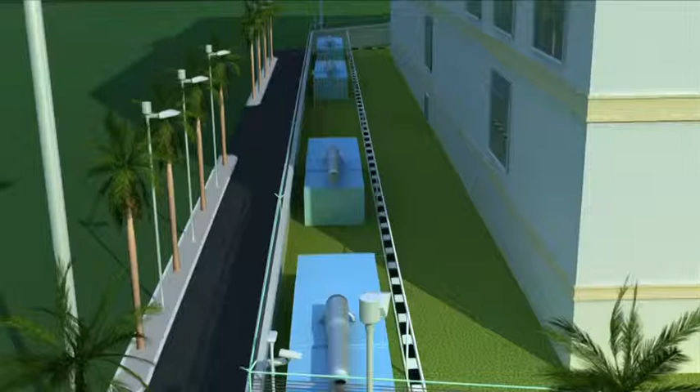With 900,000 square feet of built-up space, adequate space is available all around the building to permit creation of dedicated substations for power, bases for generators, rainwater harvesting, landscapes, diesel tanks and a maze of underground services and cables.

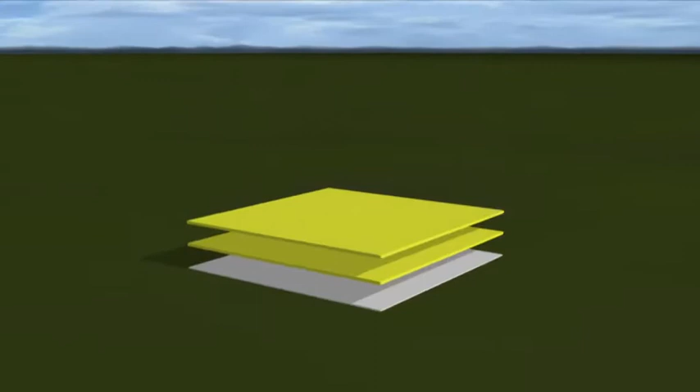The building is a 7-level structure, including 2 base floors that house the utilities and office area. The building's ground and first floor cover the complete area of the building.

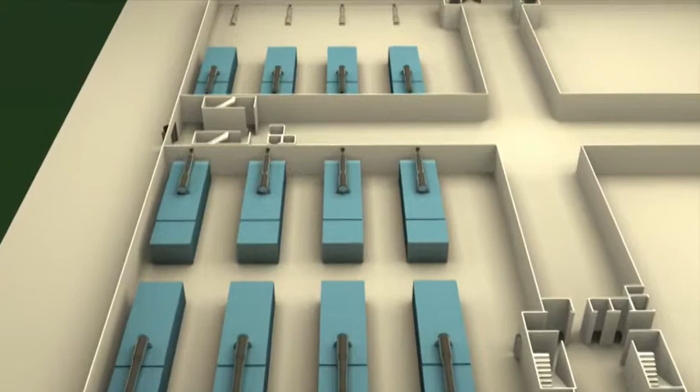The ground floor houses 16 generators of 4 megawatt capacity each. A foolproof dry powder anti-fire system ensures against any possible fire hazard. In addition, 4 generators are placed on the setback.

2 complete floor plates of 25,000 square feet each are set aside as staging areas for equipment for future build of the data center.

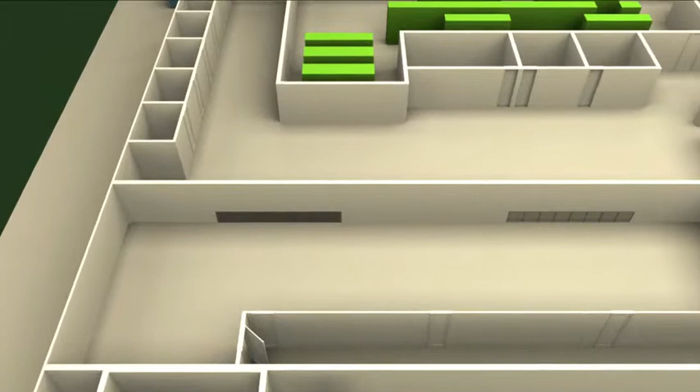A world-class network operations center ensures that the best managed services can be provided to users of the data center for managing their equipment, including servers, routers, firewalls and all equipment.

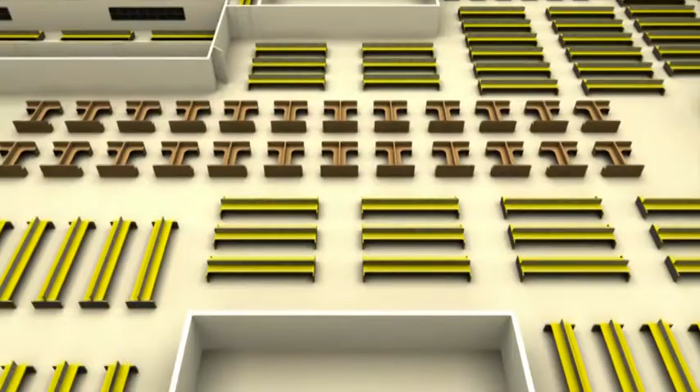An integrated management system ensures that every equipment in the data center is managed effectively and any problem in any equipment is addressed immediately. Up to 1,500 seats for staff of customers ensures that support is available to them as soon as they need it.

The facility has provision for up to 50 meeting rooms. 2 large meet-me rooms give enough space to all domestic and global telecom service providers.

Through this facility, internet service providers, telecom carriers and business customers can access the internet or carrier data services without any restrictions on the bandwidth.

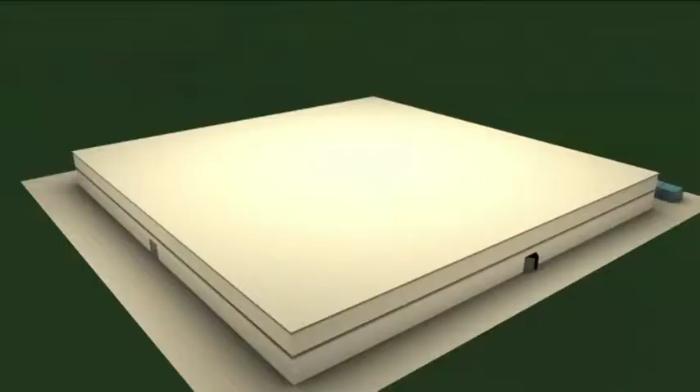With one cross-connect, the Meet Me Room at the Data Center will provide your businesses with access to customers and service providers around the world. 4 towers from the 2nd floor onwards, with 5 floors each, provide 20 separate floor plates of approximately 25,000 square feet to build large data center plates with 2 halls each.

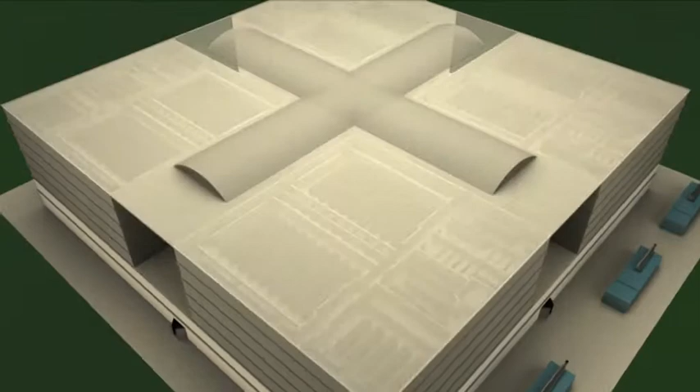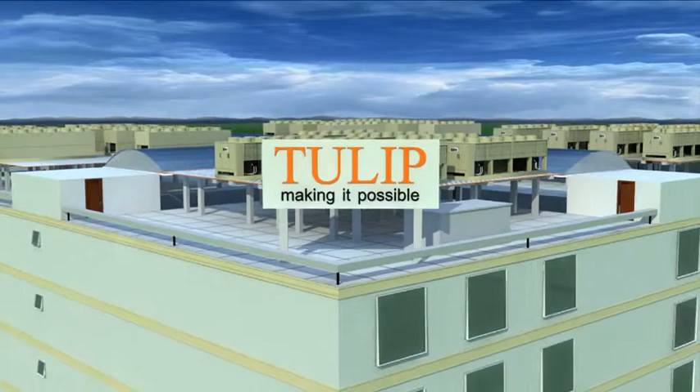Approximately 30 chillers of almost 500-ton capacity provide all the cooling required for equipment consuming up to 100 megawatt of power. The data center is designed to have 66 kV power from 2 separate grids.

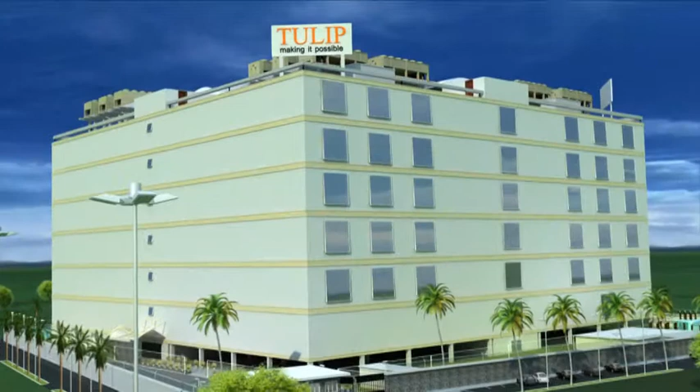The area in front of the building houses a 66 kV substation. 11 kV feeds are used to transmit power to each of the 20 floor plates where they are converted to 415 volts.

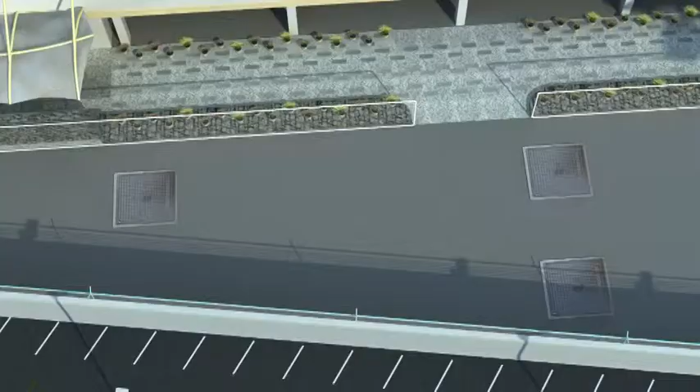There are generators with a capacity of 4 megawatt each to make power available during short and long intervals of power outages. 3 large fuel tanks ensure uninterrupted fuel supply.

The data center is designed for up to 14,000 racks. This could entail a total need of up to 100 megawatt. Each rack is supplied power from 2 different UPS systems to offer source redundancy.

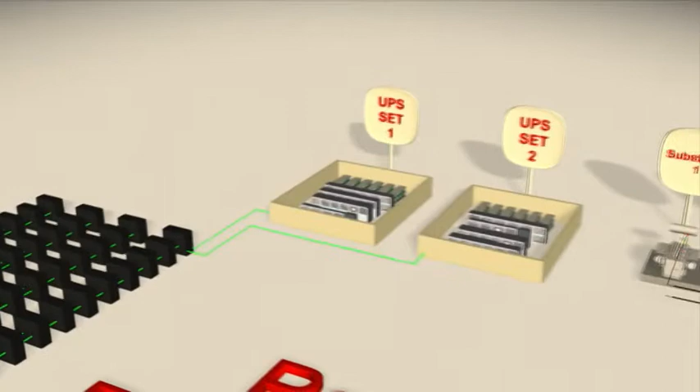Each of the UPS has a 15-minute battery backup in case of power outages. Each set of UPS is supplied power from 2 different dedicated substations. If one substation fails, the other one comes into action automatically.

In addition to this, the facility is backed up by 2 sets of generators. Fiber optic connectivity is delivered to the building by 4 separate underground entrances.

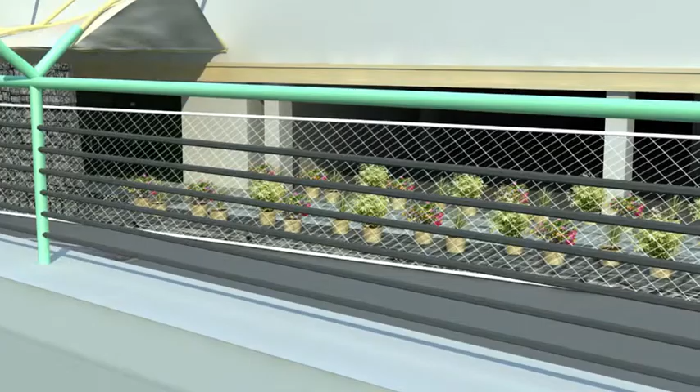The data center offers the highest levels of security supported by the latest technologies. A modern fortress surrounded by a concrete stone compound wall of 10 feet height with a further 4 feet high intelligent fence. Any violation triggers an immediate response.

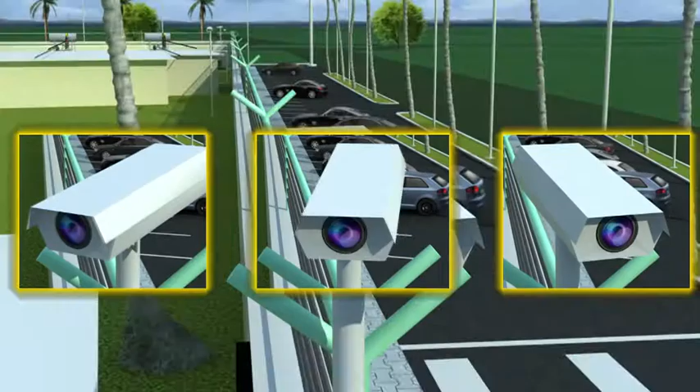With up to 1,500 cameras, every nook and corner of the facility is monitored in real time. An advanced image monitoring system ensures that any camera that has movement is monitored.

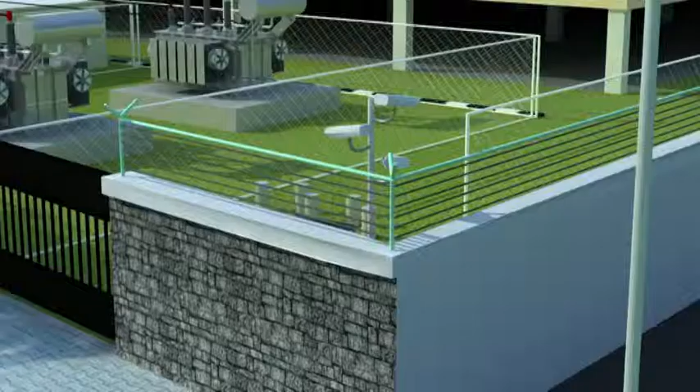Every person in the facility is monitored at all times, and a playback of anybody's movement from entry to exit from the data center is available.

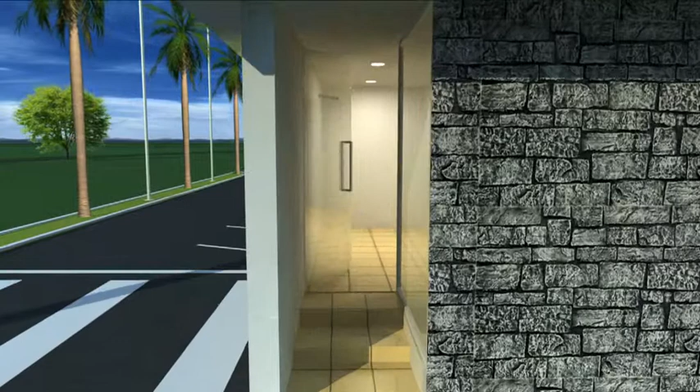2 separate gates allow for separation of movement of men and materials. The facility is protected by an integrated 5-layer physical security.

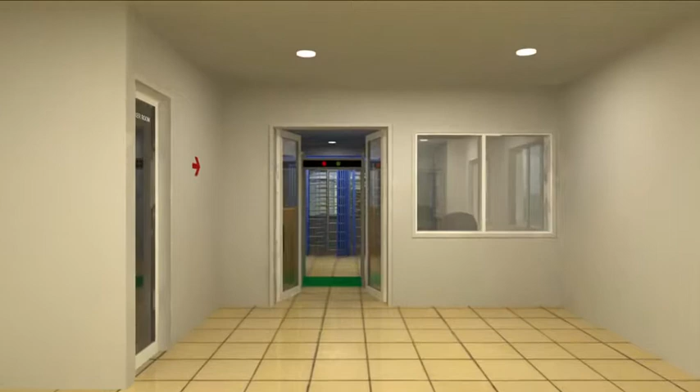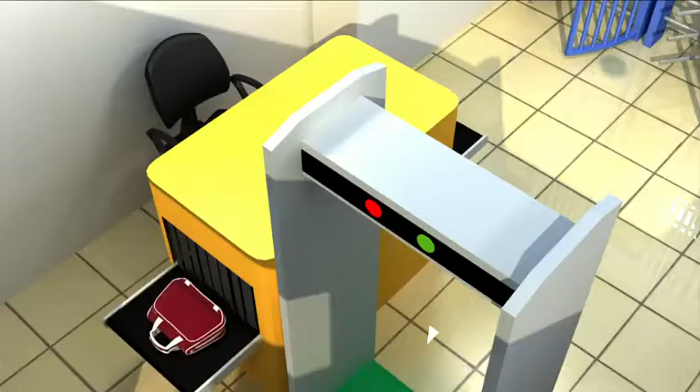A large number of lockers are provided at the gate to store non-permitted items. Metal detectors, handheld scanners and explosive sniffers ensure that no banned item enters the premises. All bags are scanned through X-ray machines.

Once identified with RFID-based ID cards and biometric scanners, all visitors pass through full-height turnstiles to prevent any forced entry. A sophisticated visitor management system ensures that every visitor has a welcome entry and is escorted at all times.

Turnstiles allow pass holders permitted by customers to enter their data halls. Visitors are guided through the reception to the Executive Briefing Center.

Every person has access restricted to the areas that are permitted by customers in their own cages, with RFID access cards and biometric security.

In an active data center, movement of material needs to be handled extremely carefully and securely. The west gate is reserved for material entry.

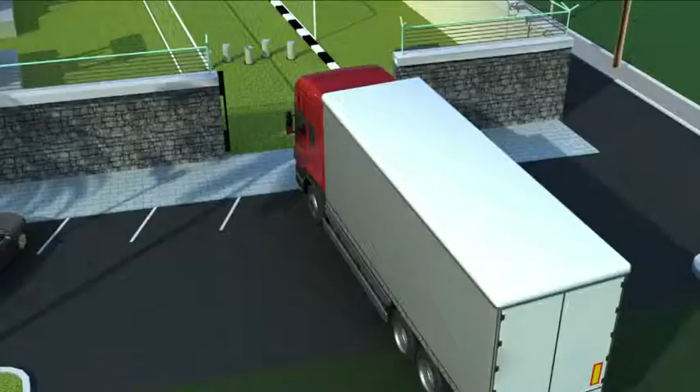As soon as a truck or a vehicle reaches near the data center, its occupants approach security staff with the documents. Thereafter, the vehicle moves to the unloading bay.

Customer equipment goes to the equipment unloading bay at the rear of the building, where facilities exist to unload packages up to 5 tons each.

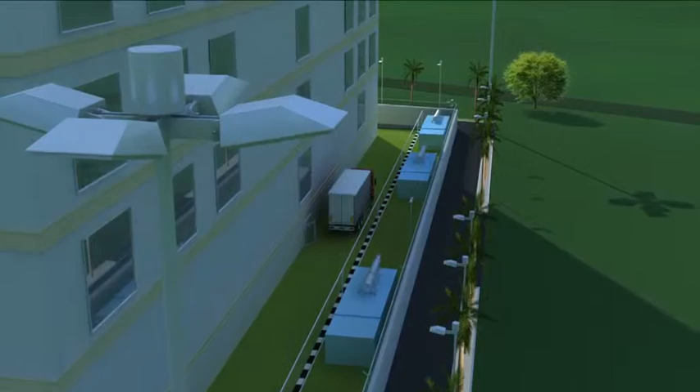Equipment is taken by forklifts to the equipment unpacking room. Unpacked equipment is taken to the assembly room where the racks and equipment are assembled.

Firewalls and the best security products and applications ensure the highest levels of security of data in the data center.

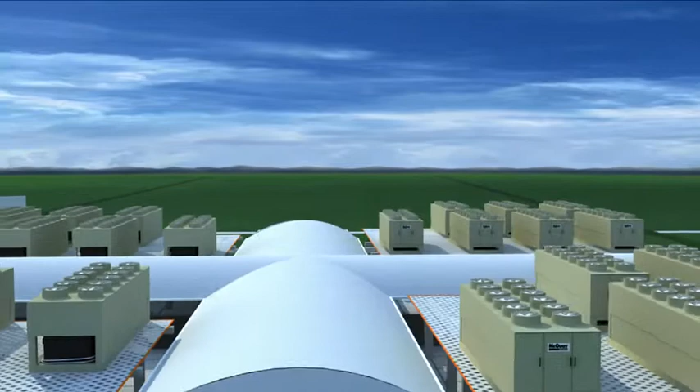39 air-cooled, water-based chillers are installed on the roof of the building for cooling purposes. This gives the advantage of using any terminal equipment for precision air conditioners, in-rack solutions for high power using racks, and water cooling for large water-cooled servers.

This makes the data center truly cloud-ready.

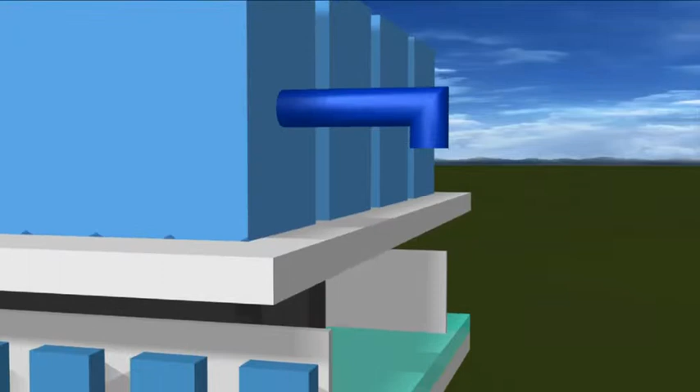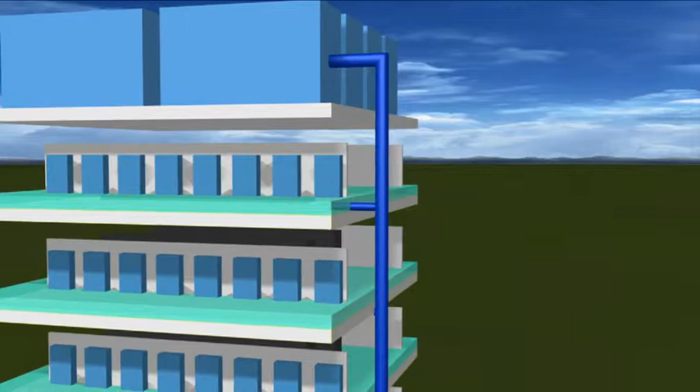Large pipes of 2 feet diameter carry water vertically to and from the chillers in every tower. Within each tower, 1 feet wide pipes are used to deliver water to each floor within every tower.

The data center uses numerous technologies to improve the power usage effectiveness. Redundancies are built into every aspect of the system, including piping, chillers, precision air conditioning, etc.

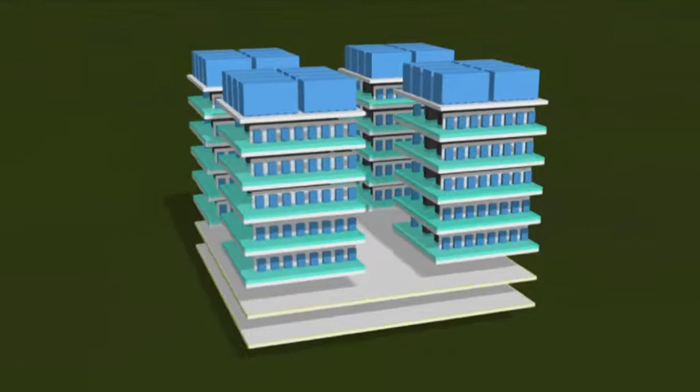Although the medium of cooling is water, the entire system is foolproof with respect to water leakage. In order to improve the efficiency of the cooling system, the area of the cold aisle is contained so that

the cold air does not mix with the hot air in the rest of the room, and the entire data center acts as a hot air plenum.

Although the temperature of the room rises, the air reaching the servers is cool, thus bringing in more efficiency.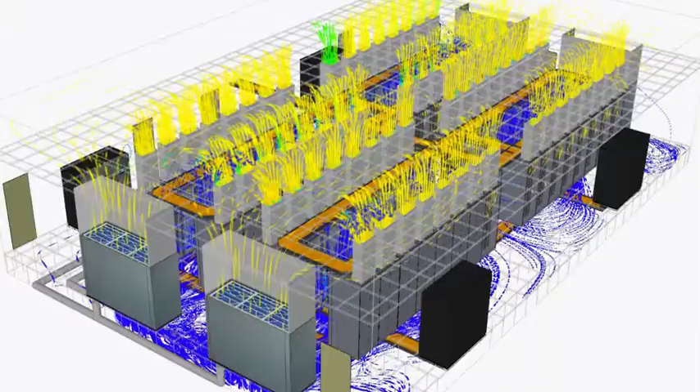A CFD, or computational fluid dynamics, analysis is done to measure environmental conditions including airflow, temperature, humidity, pressure differentials and other parameters of interest such as power, intrusion detection and equipment failure notification.

The data center can be divided into data center area, electrical areas and office space.

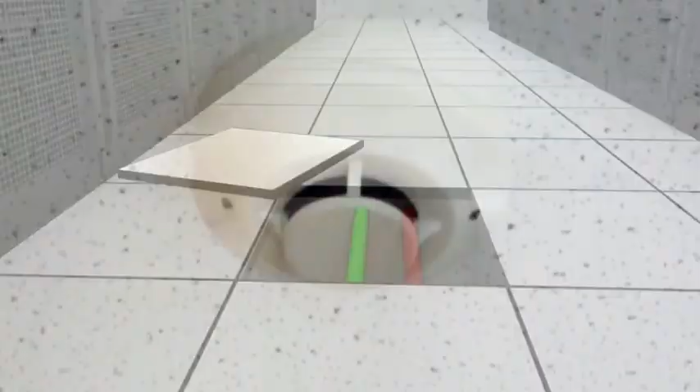Data center fire protection is provided by the firefighting system Novec, an inert gas that delivers the highest quality of safety. Smoke and heat detection sensors are installed on the ceiling and below the raised floor.

Integrated fire detection, alarm signaling and extinguishing systems provide a comprehensive safety solution.

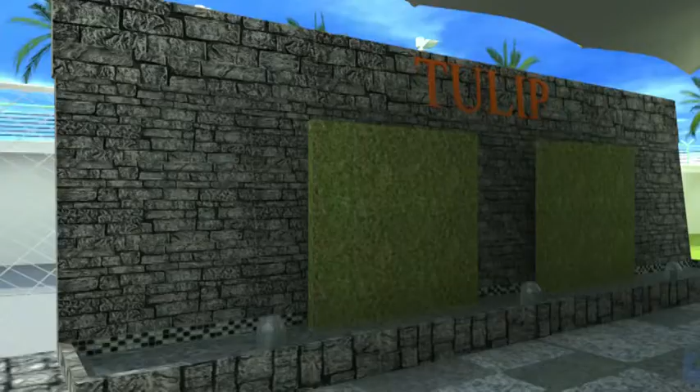In keeping with the highest in green standards, the data center works to bring efficiency under every head as required by the LEED standards.